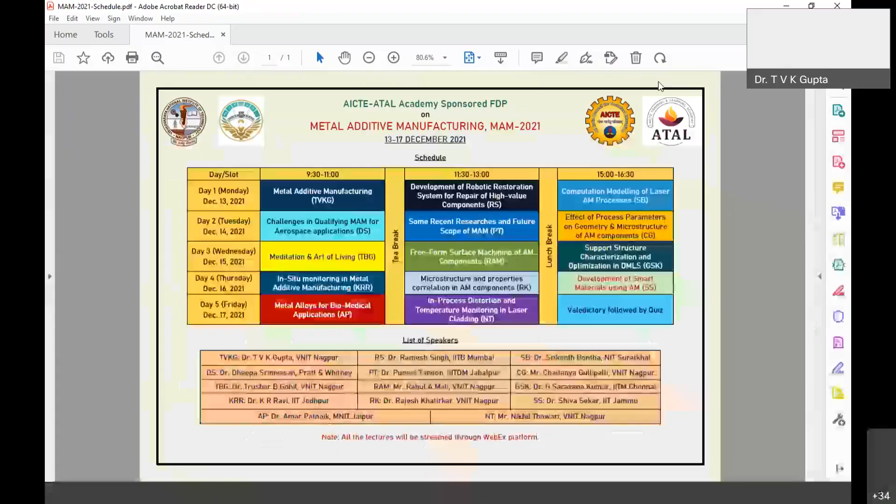Can you see the schedule? Is it visible? So the second session will be conducted by Dr. Ramesh Singh from IIT Bombay, and after lunch we will be having one faculty from NIT Surathkal, Dr. Saikanth Bontha, who will talk about computational modeling of laser additive manufacturing process. These are the 3 sessions for today.

Tomorrow we'll have 3 sessions. One from Dr. Dheepa Srinivasan, who is heading Pratt & Whitney in India, followed by Professor Puneet Tandon.

He's from IIITDM Jabalpur, and post lunch we'll be having a lecture from one of our PhD scholars who is working on process parameters and their effect on geometry and microstructure of additive manufacturing components.

On Wednesday, we will start the day with a session on meditation and the art of living by Dr. Trushar Gohil, who is from VNIT and my colleague in the Department of Mechanical Engineering. That will be followed by one of the PhD scholars.

He will be talking about how to carry out post-machining operations and freeform surface machining of AM components. After lunch on the third day, we will discuss support structure characterization and optimization, by Professor G. Saravana Kumar, who is from IIT Madras.

On the fourth day, the sessions will start with in-situ monitoring of metal additive manufacturing, delivered by Professor K. Ravi from IIT Jodhpur, followed by microstructural properties correlation with additive manufacturing components, by Rajesh Khatirkar.

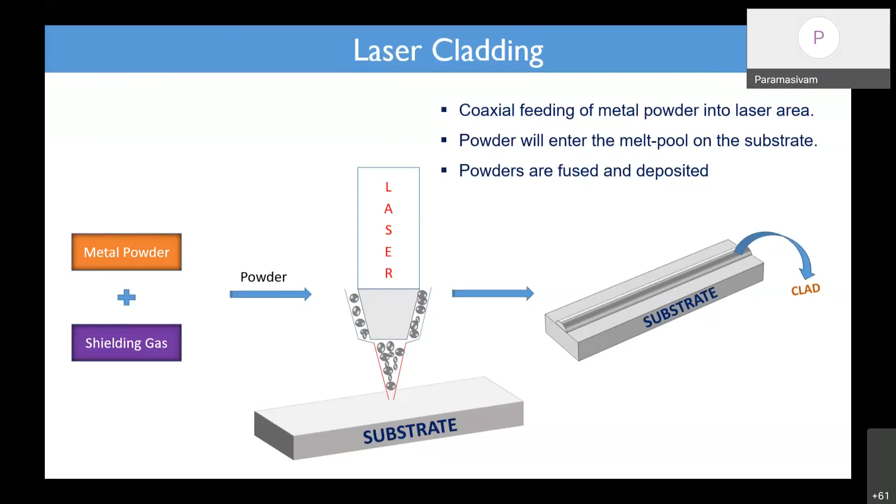If I want to use this laser cladding process as additive manufacturing, you have to do a lot of homework - whether when depositing layer by layer using high power or high wattage, each layer is getting adhered with proper adhesion strength or not. So we started working with single layer, double layer, and now we have gone up to 15 layers, making this laser cladding work.

So when you talk about additive manufacturing using this process, let me just show a small video of how we are going to deposit it.

Can you see the video? Is the video visible? Yes, sir, it is visible.

Now, it all depends on the system which we are currently using, the same system as our industry partner. There it is rotating from the bottom. But if you try to use a prismatic or freeform component, the gun is going to move according to the shape, controlled by a robotic arm.

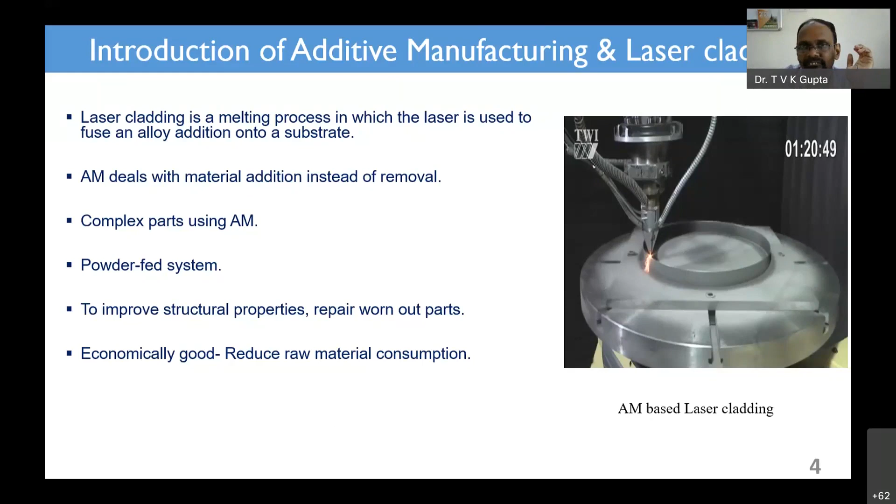Now, in the second project, we have to make sure whether Inconel material works, because turbine blades and gas turbine blades are made of Inconel material, since it has the properties to sustain very high strength at high temperatures. It should not lose its properties. So the project we are attempting is whether an Inconel component can be made by this laser cladding process or not. So we started working.

I'll show you some of the results where we went up to 12 layers. There are very good results which we have obtained.

Now, before coming to this laser cladding process of Inconel, we started with some hard alloys where you can increase the service life of the component by using some sort of deposition.

So we started with, okay, now when it comes to the process, what are the parameters which you are given a choice or freedom to change?

If you see, these systems are very, very expensive. A small 4 kilowatt machine, which we are using for the laser cladding process, costs somewhere around 6 to 7 crores for the whole setup. So the industry partner also will not be very interested to change the parameters. Whatever the OEM says, whatever the component or machine manufacturer says, they are going to strictly follow.

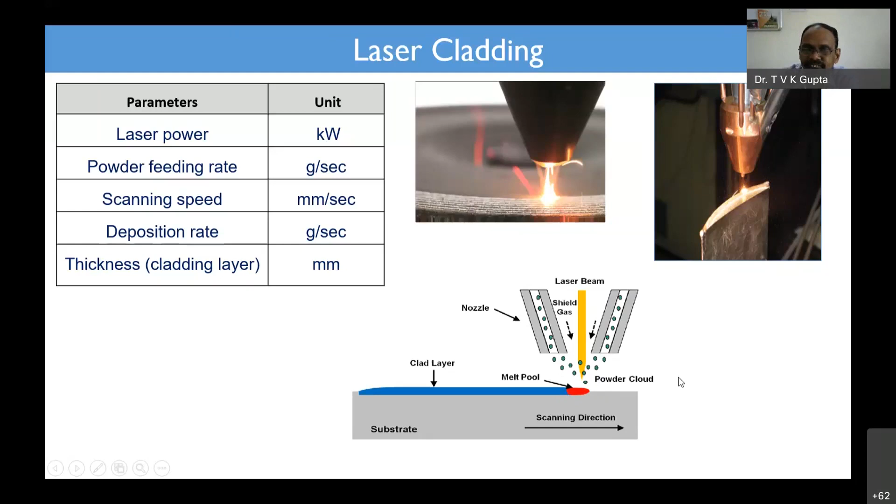Now we started our journey with Stellite 6, which is a cobalt-based stellite, a very tough material. This can be used in very high corrosion resistance environments.

So before starting any of the experiments, we used to characterize whether the chemical composition of Stellite 6 is according to the standards or not, because there are many companies who supply Stellite 6 in the country. So whoever is the supplier and whoever we buy from, first we used to characterize our powder.

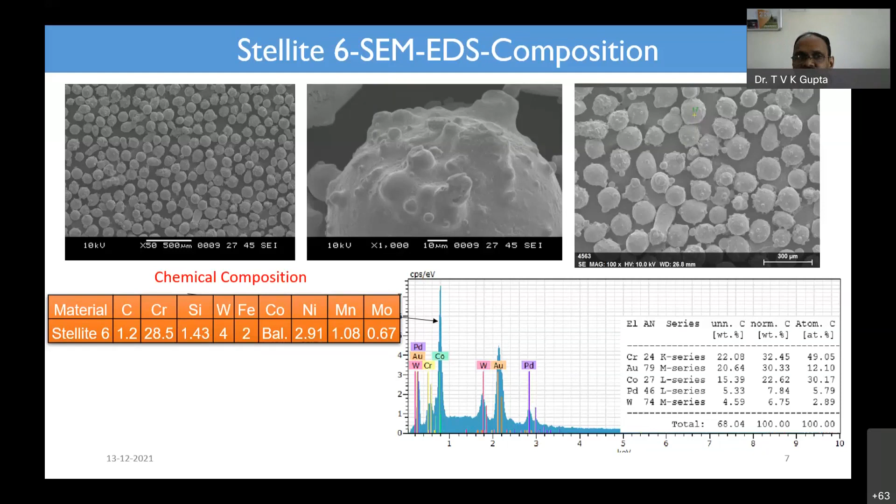Powders might come in different forms; it can be spherical or spheroidal, depending on the type of powder. For example, tungsten carbide will have a triangular shape of components. So these are the things we try to analyze through SEM and EDS analysis to understand the chemical composition. Even the manufacturer does the same thing, but we also get confirmation with our own tests.

This is the first set of experiments we tried with our industry partner. Initially when we approached the industry, they weren't very open to changing the parameters, but they wanted to do some research because on the components they had worked with, they had ignored certain issues. In the substrate, when depositing, there is a small amount of distortion we observe. We had considered it as a perfect plate, but when we deposited material, there was distortion on the substrate because of thermal deformation.

So we targeted how we can reduce this distortion. Based on this, we got about five different journal papers which people have appreciated in the country also, because Stellite 6 is used at very high temperature and harsh environment. This distortion in the substrate caused by heat is not allowed. But what they used to do is that though distortion is coming, they would do the machining process such that it becomes perfect again.

So instead of reducing the effort through post-processing, we asked whether we could do something more like optimizing the process itself. They had done optimization before, but it was superficial, only 1 or 2 parameters. We did a detailed investigation for 3 years. These parameters have been transferred to the industry partner, and today the life of the component they are making has gone from 2 months to 8 months, some components even up to 1 year, because we did a proper scientific and technical analysis.

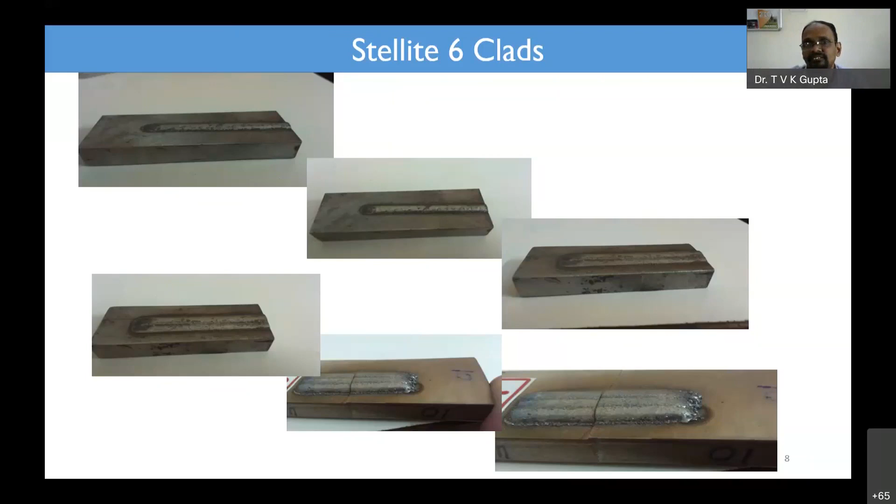So this is the first set of experiments we started. The machine we are using is about 4 kilowatts, and generally 80% of the power is suggested, but we went up to 90% of the power. We started with low power, 2.31 kilowatts, and also did 3.135 kilowatts. We did single layer, multi-layer, single track, and multi-track experiments to try to understand the phenomenon.

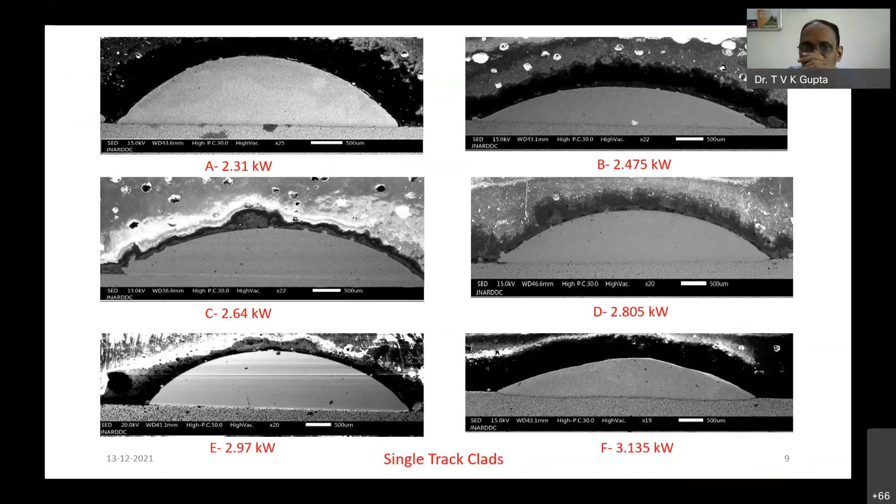These are the single tracks. If you see, multi-tracks means 1, 2, 3, 4, and multi-layer means 1, 2, 3, 4 like that. For these multi-layers, we went up to 12 layers with the Inconel. I'll be showing that very soon.

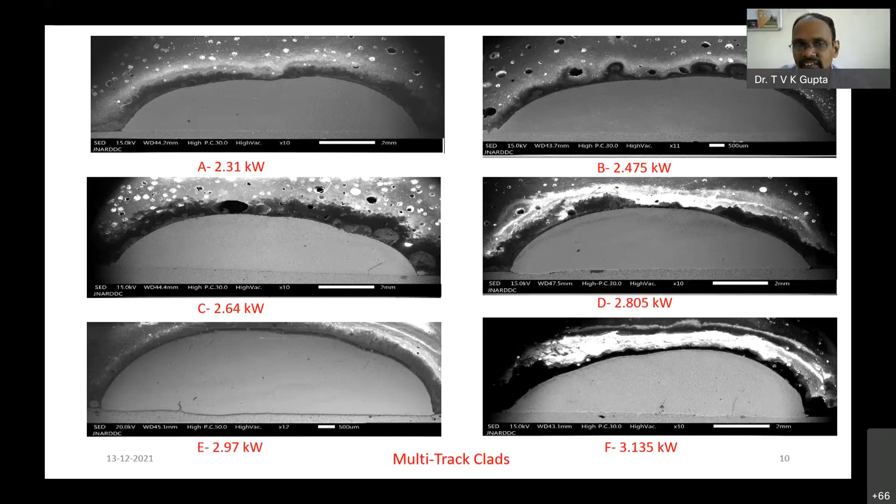Now, for the Stellite 6 cladding, they were not using high powers because they were more worried about their system. They wanted high deposition rate and faster movement also, because every industry partner says the faster the work gets done, the better it is for them. So they used to complete the process at a very fast rate with high deposition rate. But that will not work. If you use high deposition rate and high scan speed, you should have enough time to fuse that material, otherwise you will see a lot of wastage with no proper deposition.

So we asked them to address that too, and we did a pure scientific analysis. To convince these people took almost 6 months, but finally they got convinced in the first 6 months, and they have helped us a lot. We should thank Srinath Engineering Industries for that.

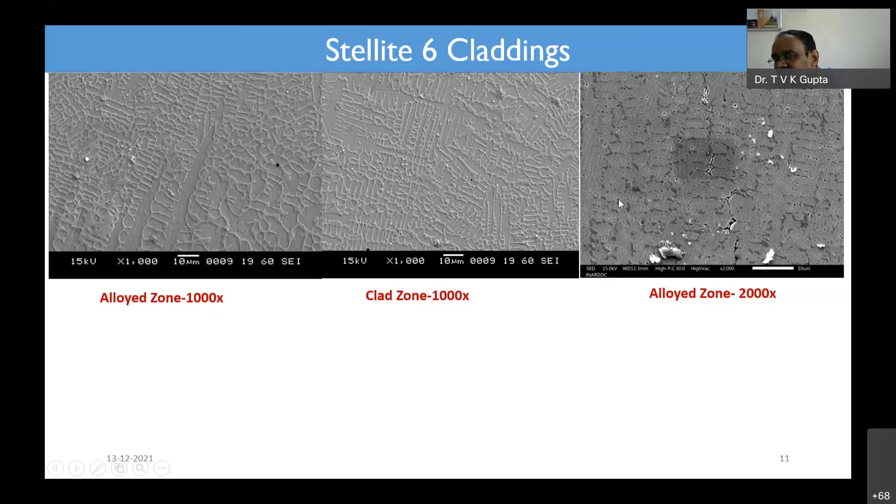If you try to see the SEM of the laser cladding of Stellite 6, this is the alloyed zone, this is the clad zone, and this again is the alloyed zone. But if you try to see at very high powers, what we have observed is cracks. This is not allowed, because in the process itself, there is a tendency for cracks to happen.

So then again, we restarted our work to try to optimize such that there should not be any cracks. In order to avoid cracks, we needed to reduce the thermal difference between the substrate and the clad. So how can you reduce that?

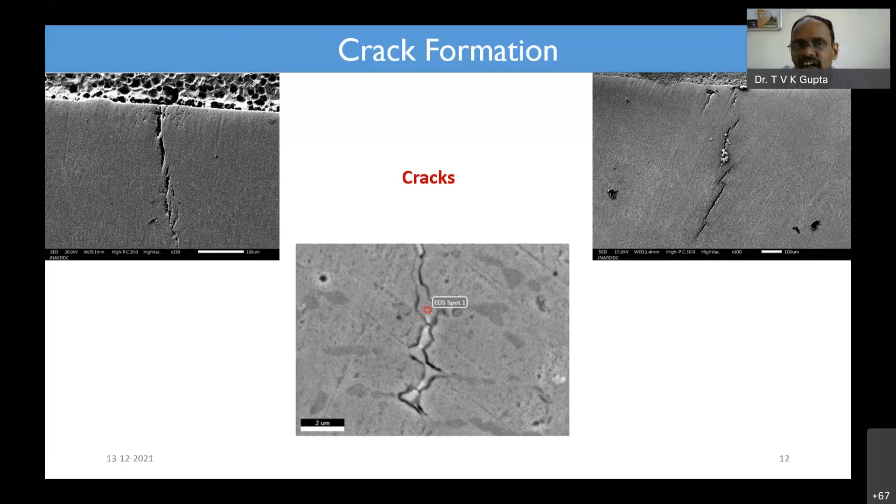Basically, you can reduce cracks by preheating the substrate, or you can change the parameters. That is what we have done. So in the next set, there were no cracks.

This is one component we have done for mining industries. These are the hard facing points, used in JCBs. Each tooth weighs some 30-40 kilos. After a week, you see the teeth worn down like something. So we tried to understand why this teeth is becoming like this within a week. And it is very expensive. Each tooth is so expensive that you cannot afford to change it every time.

So what we have seen is that wherever there is a hard contact point, we tried to face it by doing some finishing operation, surface finishing, to increase the surface life. Now every 6 months, or they are going to 6 months. Initially they were going every 3 months. Before that, they were changing it every week or 10 days. Now at least they are happy with this. Almost 600% time, they have increased the life of the component with this small amount of coating on the surface.

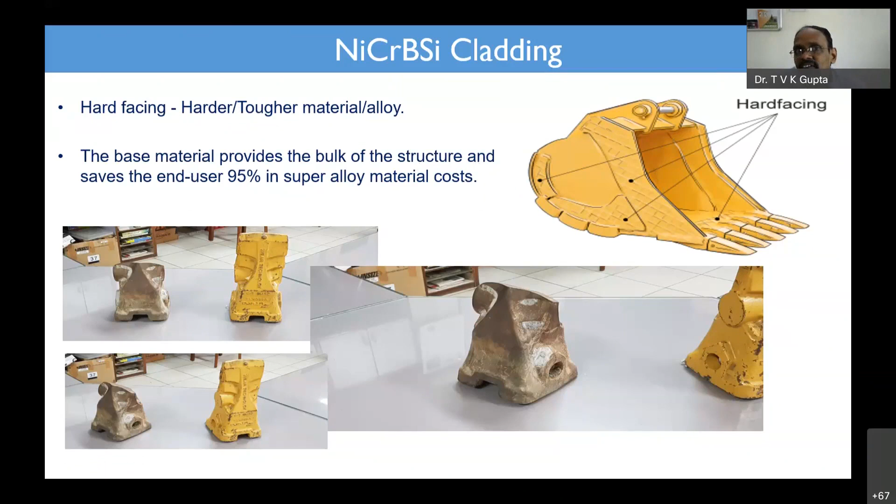Now, we understand that there are various aspects in laser cladding, because heat is involved, mechanical properties are changing, and metallurgically, though they say it will not change, there will be some amount of change in the properties. So what are the aspects which we can work on from a research point of view?

We thought first we have to understand what process parameters are going to affect the microstructure and mechanical properties. So then we understood the heating and cooling cycle, how heat transfer takes place, and what will be the melt pool shape and size, dynamics, and solidification. These are the aspects which we targeted and worked on, and we were successful.

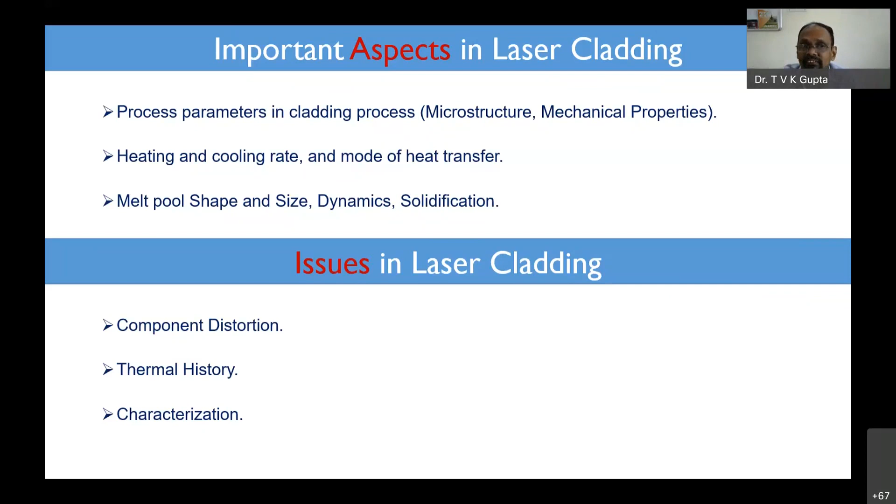So the issues, as I told you, component distortion will be there. What is the characterization property? What are the mechanical, metallurgical properties, and what will be the thermal history? Those things we targeted and worked on, and we were very much successful.

The first thing is, when you say distortion, how much is the distortion? How are you going to monitor it? You need to have some sort of setup, some sensors, because distortion is happening due to temperature. How can you reduce the temperature? You should know what amount of temperature the material is subjected to. It's not that if you give 2 kilowatts of power, the temperature is fixed - it's a combination of many parameters.

So then we made our own setup, our own fixtures, and one of our PhD scholars has worked on this for his PhD. He worked with pyrometers and a laser displacement sensor. He will be talking about those things in the last lecture, the research he has done in the last 3.5 years. We used laser displacement sensors, pyrometers, and different fixtures - 2-3 fixtures we tried, and finally we arrived at this fixture.

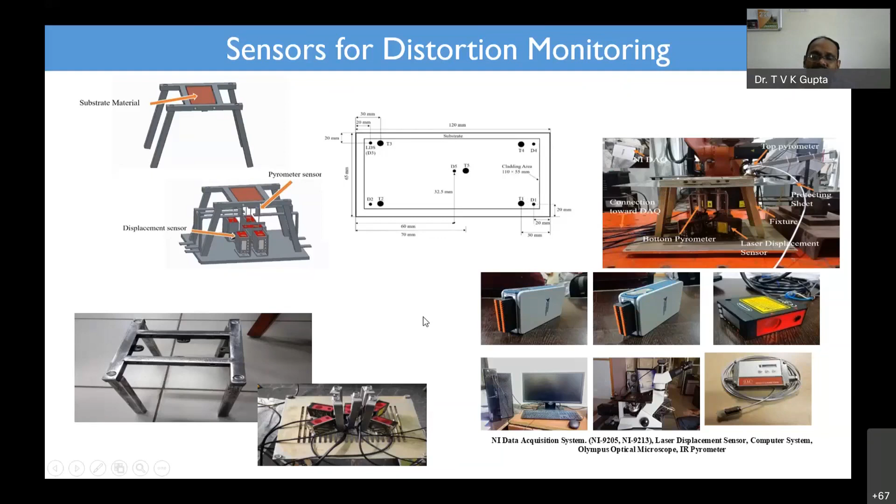Now, how can you monitor the temperature? You need to have a pyrometer. So bottom temperatures also we have generated, and there is a top pyrometer also which we used, where you can understand the melt pool. If you understand what the temperature is, then it is obvious.

Over a period of time, we thought, why are we making only direct stellite 6 on stainless steel? We thought, can we use a different material instead, where you can increase the hardness of the component and reduce the temperature difference such that the deformation also can be reduced.

So what the student has done is use a buffer layer concept. A buffer layer is like a sandwich - in between two layers, you have one more layer, which gives a better result. Here also we have used Inconel 625, where between the stellite 6 and the stainless steel, we made a sandwich material of Inconel.

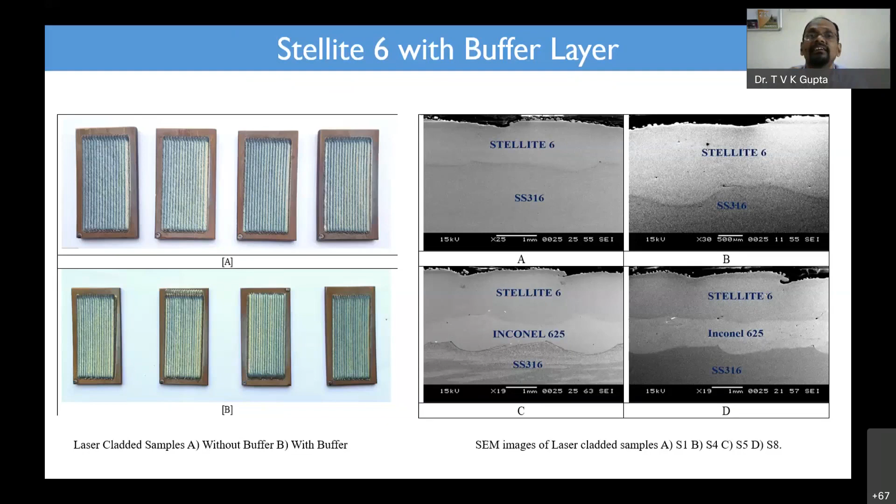So he has achieved 2 papers also from this work, and the industry partner is right now doing the same thing for his components.

So then we try to optimize, and this is the best possible thing which we could also understand.

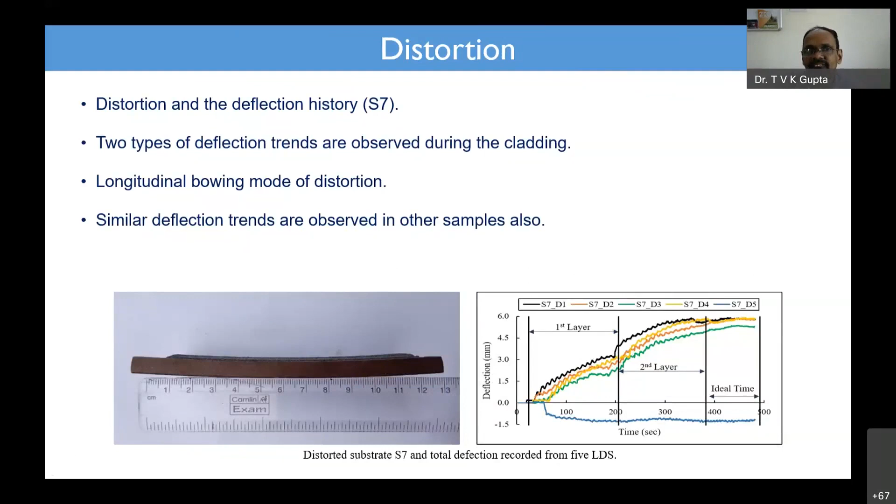Now, different parameters we studied, if you try to see, each layer got almost 16 tracks, and 2 layers, up to 2 layers we have worked. And the next set is that we went up to 12 layers, that's a different part.

So we started with Stellite 6, I told you, 2 layers we have done, and we are understanding how the track temperature is being changed, how the layer temperature is also changed. Because temperature always leads to deformation, and deformation leads to distortion.

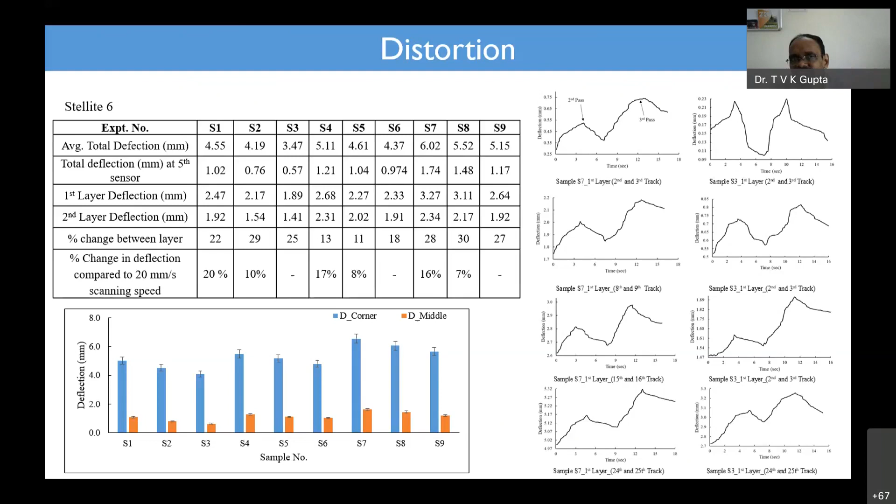Then we tried with temperature monitoring. So in order to monitor the temperature, we have used pyrometers. Before that, we thought that we would use some sort of simulation process where you can understand what is the process in which the temperature is going to vary across the surface.

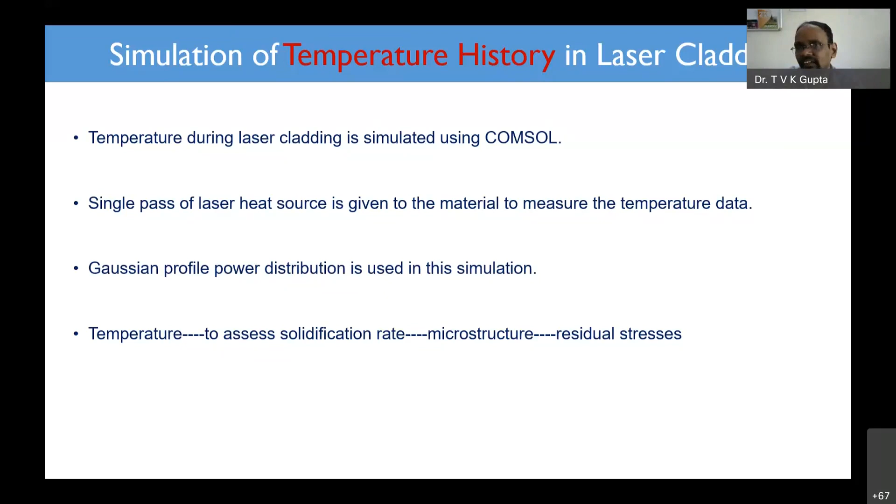So we used COMSOL to understand the temperature distribution in the cladding process. We have used a single pass heat transfer source to the material, and to measure the temperature data we have used pyrometers in almost every location. The temperature through simulation we got, and whatever is experimentally obtained, we tried to simulate it.

Now, if you see, the laser is moving along this path, and the temperature at a point is going to come out something like this. This is the present model which we have used, and this is the model which was used by someone else about 10, 12 years back. So now we are getting the same process actually.

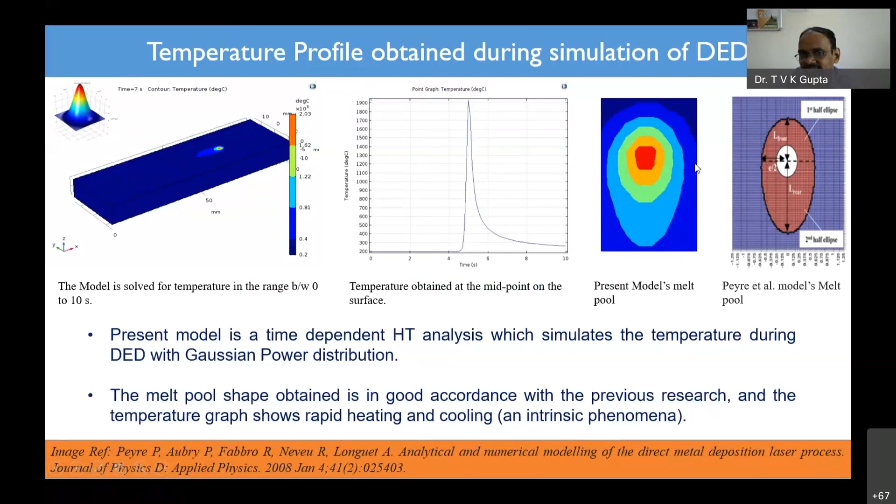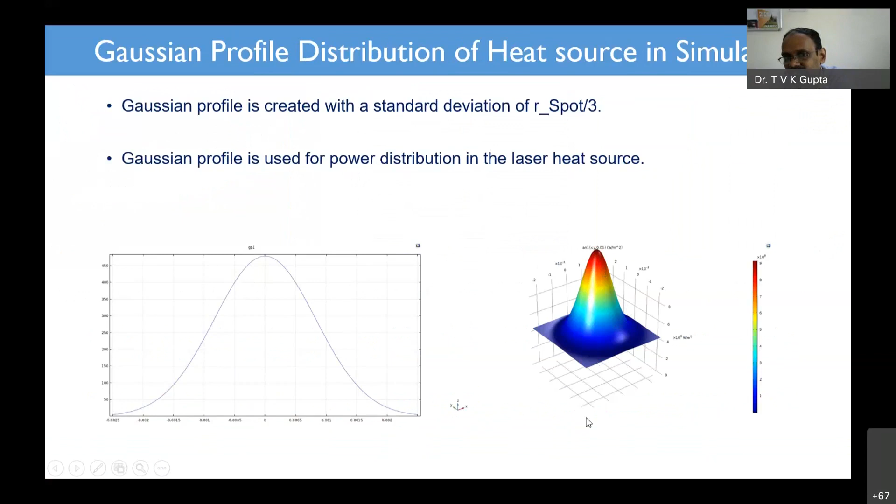So whatever simulation we are doing is correct actually, since we have used a Gaussian power distribution. Now this is the Gaussian distribution I told about. The power profile is the Gaussian distribution, and you are going to see the temperature profile along the thickness, along the width, and also along the depth.

Now, if you see at each and every layer, each and every point, you can always see there is a temperature phenomenon which is happening. The temperature is being transferred to the substrate also. Now if you see the substrate, even at this location, the temperature is somewhere around 600 to 700 degrees centigrade in the substrate.

So on the melt pool, you are going to get 1900 degrees centigrade. So this we try to simulate and also try to check whether we are getting the same result with these parameters or not.

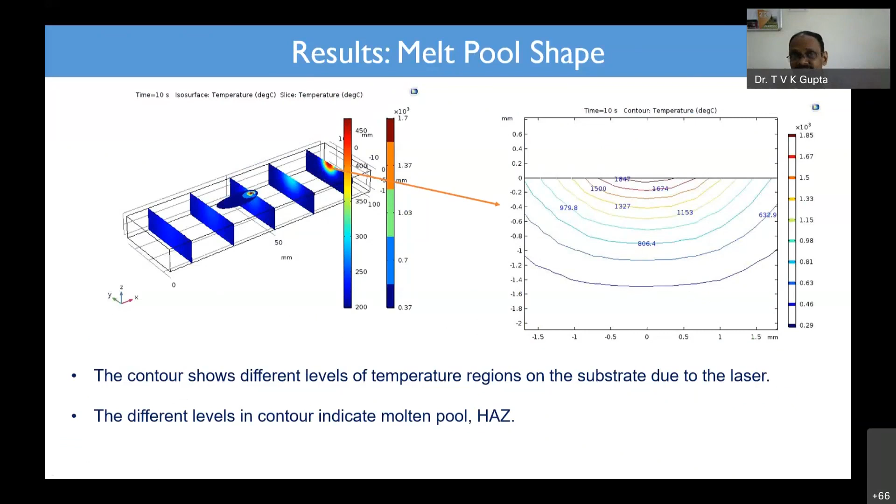So these are the temperatures approximately. We got around 1897, I think 1847 degrees temperature at this point, and after this we have done simulation at different time steps.

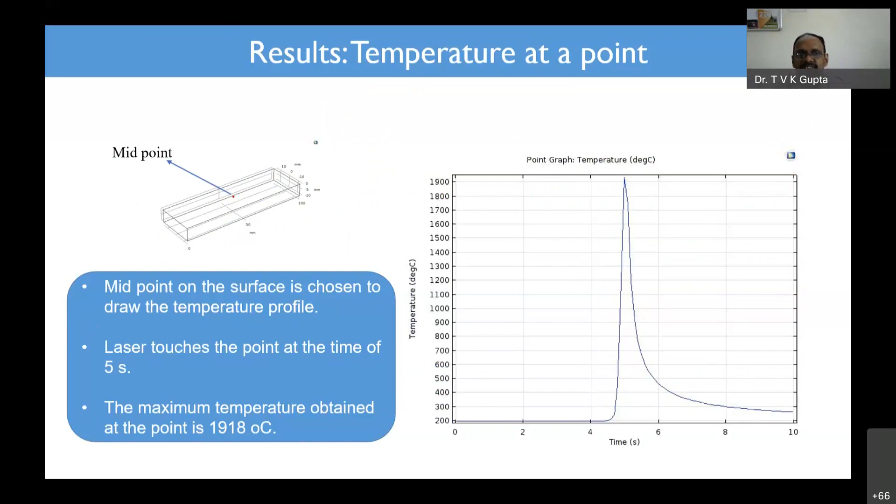Now, if you try to see, this is the profile which people have done elsewhere, and this is the profile which we got from the simulation. So more or less, it is going to be the same.

Now, if you try to see the melt pool history, there is heating, there is cooling, there is a melt pool lifetime, there is solidification, because the moment you deposit, it takes time to solidify. The solidification time also we should know. What is the undercooling? These are all monitored using our pyrometers.

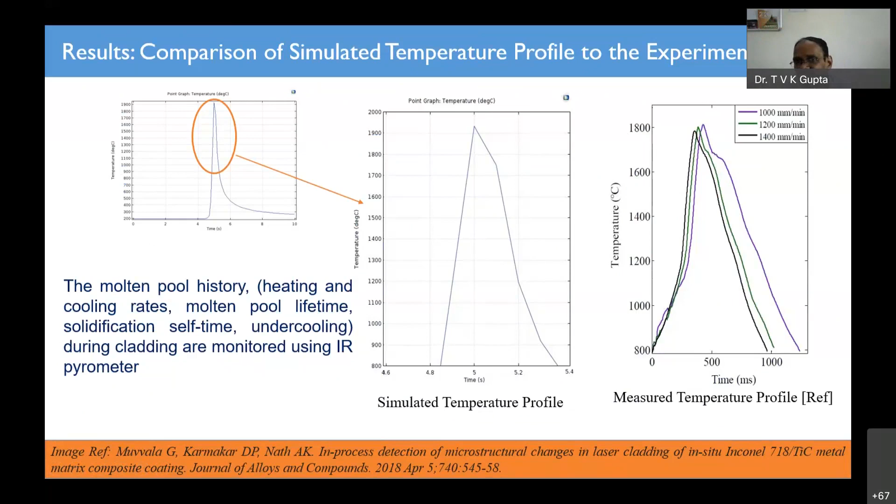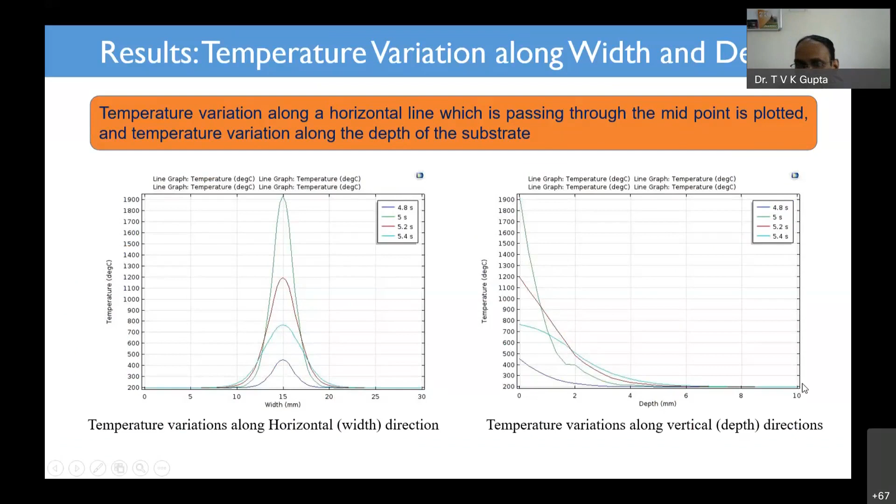You see the temperature profile along this width, this is the temperature which we got. If you try to see, at the middle point you are going to get this temperature. Now if you try to see along the depth, depth will be somewhere around 1918, and this goes to 0 with respect to depth, meaning it is coming down to the room temperature.

Now, if you see when the laser is moving, there is a distortion. You see how the component is distorting. So we try to measure this using the laser displacement sensors I told you about. Because the substrate got deformed into a concave shape. After deposition, it goes like this, and it will be a permanent deformation in the substrate. So you will have both expansion and contraction.

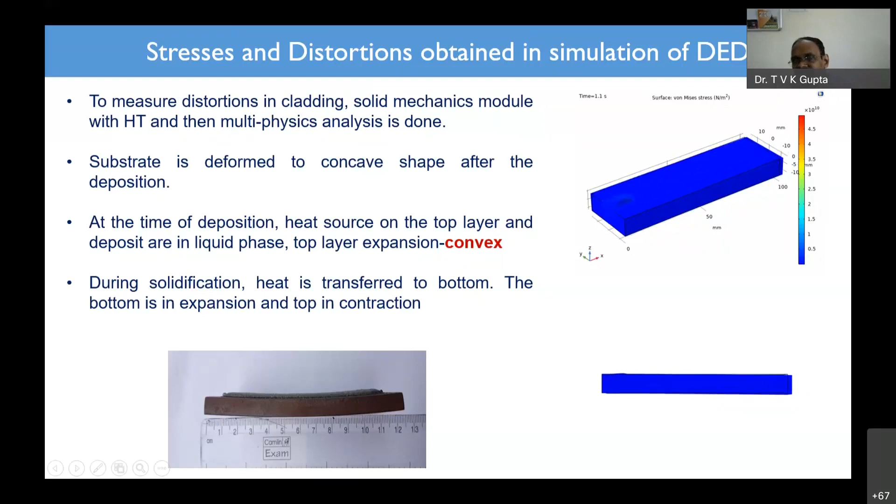Now we started with Inconel 718, the aerospace alloy, which is of more interest to us. Even the first student worked with Stellite 6 and Inconel, because more or less they have the same thermomechanical properties. He tried to correlate the distortions and temperature comparing these two alloys.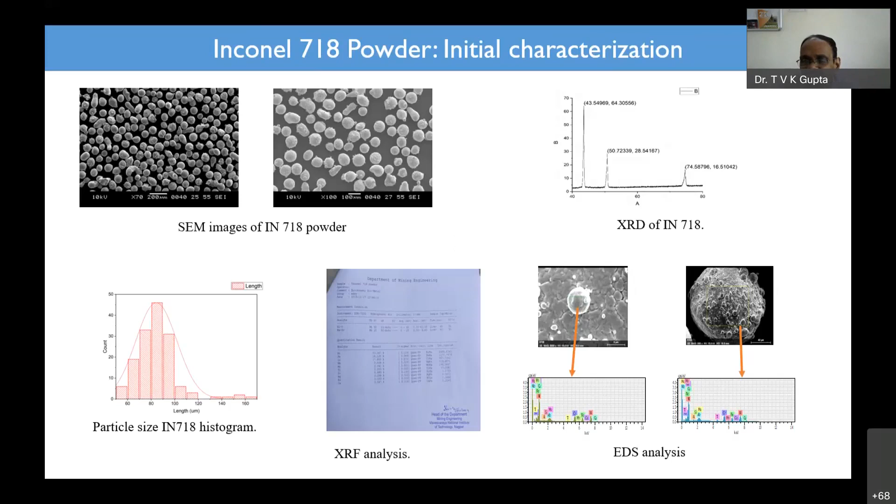Again, as I told, we have done the powder characterization. This is a simple one, and we have done the phase analysis also to understand. This is all the metallurgical part.

Now, as I told you about the role of process parameters, you should always have some information before doing an experiment. The deposition quality is influenced by process parameters. In order to achieve the best process parameter set, you should know it. So you have laser power, scanning speed, powder feed, and we have developed a model, and output parameters.

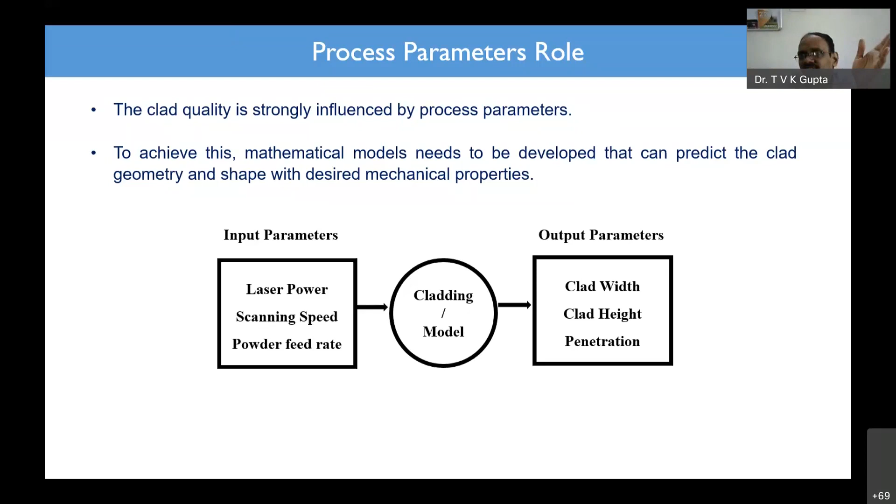Clad is nothing but deposition, and we are more interested in the geometry, leaving the metallurgical aspects aside. So the geometry of the component is more important. We try to understand clad width, height, and penetration. This is the set of experiments we have done for Inconel 718.

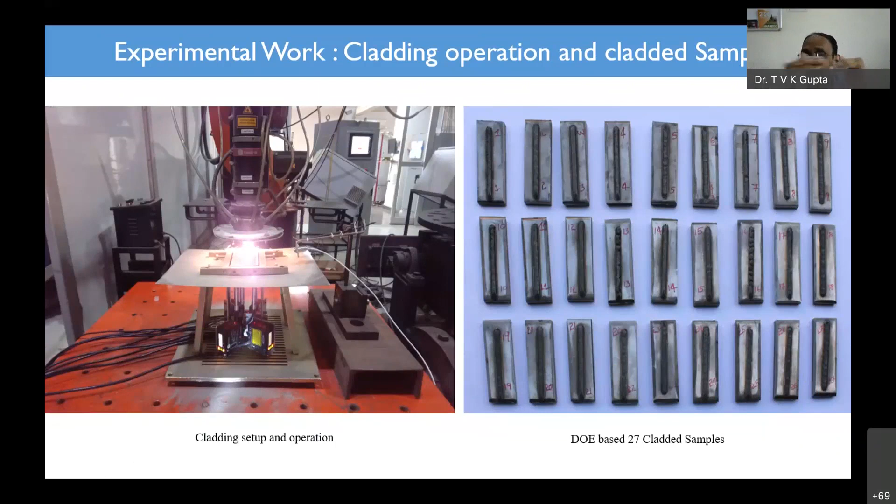All 27 experiments we have executed, we have seen. We kept a top pyrometer also to see the multiple temperatures at the top side. Now, if you see some of the components, some tracks were not deposited properly because Inconel is a very high temperature alloy. That temperature or power which we used was not sufficient to melt the powder.

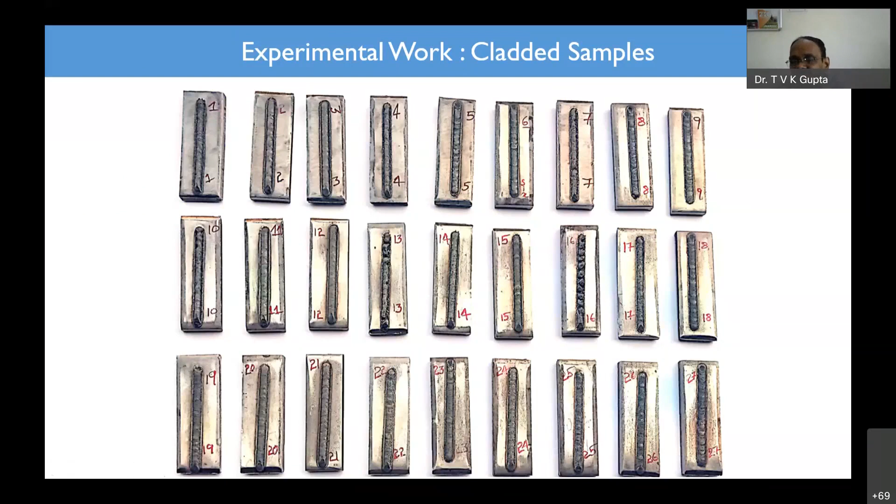If you try to see some of the components, here you see this is a perfect clad. But if you see this one, at 16, it is not a perfect clad. This one at 13 had some problems, and some at 25 also. It depends on what type of power you are going to use. These are the issues we understood in the initial set of experiments.

Then what we have done is optimize. We thought that for low powers, if you want to do deposition, you should have a low scanning speed, because you will have enough time to melt the powder and also deposit.

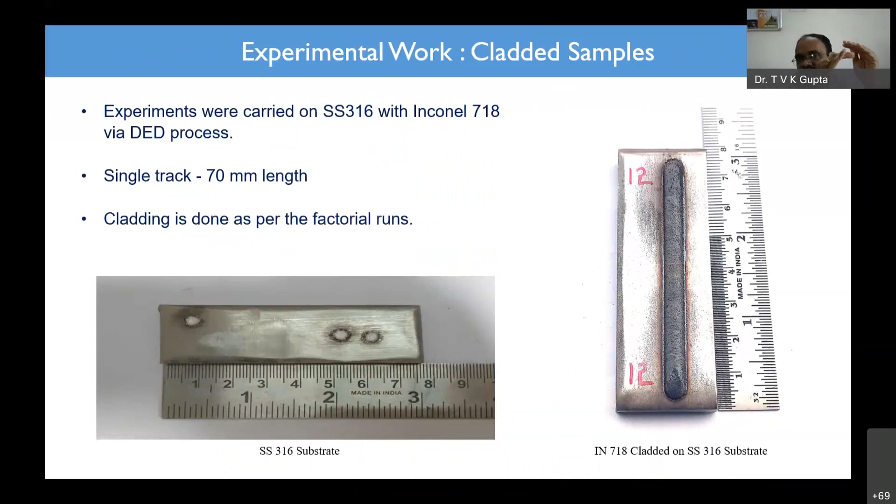Now, if you try to see, these components are all single tracks. Then we went for multi-tracks. If you try to understand the physics now, you have a substrate and a deposit, this is like a clad. So how much material is going inside? That we have to find out in terms of dilution, as they call it. The dilution has to be as minimum as possible, and it should have good bonding strength also.

So these are the samples in Inconel. We have done this for different layers. Initially we went for 4 layers also. The more layers you have, the more problems you will face. But you can still achieve a better result with more layers in order to get a perfect component, though you have to do the optimization.

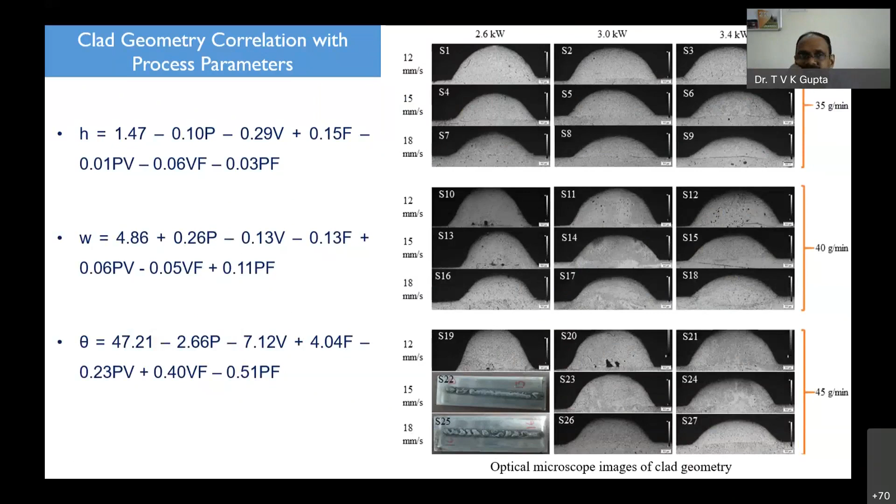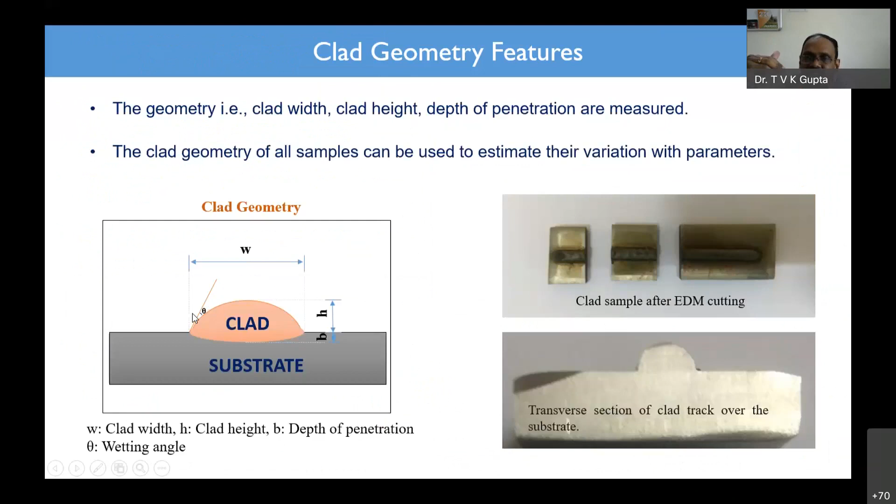Now, if you try to see all the 27 experiments, this was done by one of our PhD scholars. He will be talking more in detail about the process parameter optimization tomorrow afternoon. He was talking about the wetting angle, the theta shown here, how much surface tension you are going to use, and whether you are going to have a proper deposition or not, he will discuss.

Now, when I say mechanical and microstructural properties are going to change, that means you have a different microstructure at different levels of deposition. So all the samples were done for microstructural evaluation, to see how it evolves. This has been published in Materials Today Communications, the microstructure evaluation for Stellite 6 and Inconel 718.

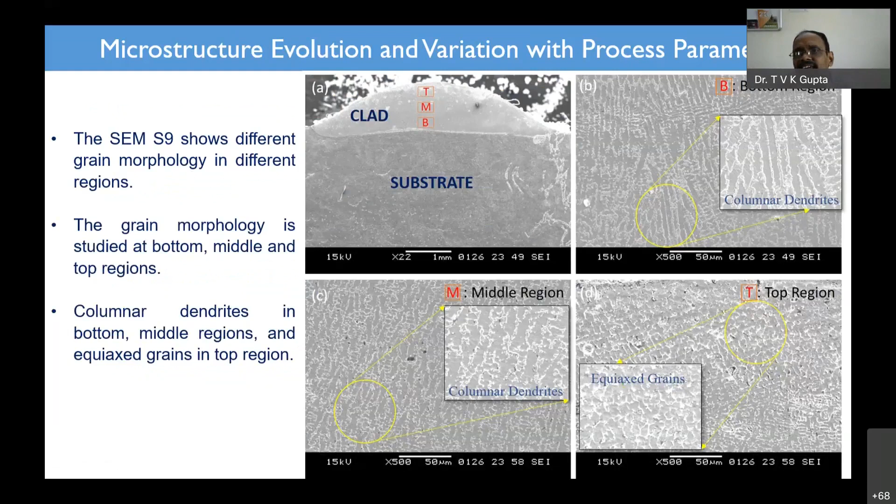Now, if you see the process parameters on the microstructure evolution, you have to see which process you will be having, a better, good solidification time and good cooling rate. Those things will be useful to understand.

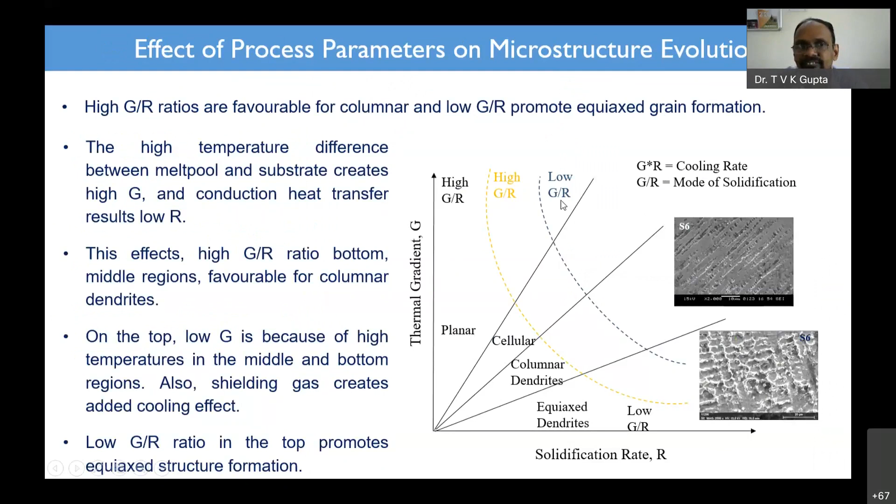So these are the microstructure samples. If you see 1 to 9, how the structure is changing for various parameters. So now people were asking about this. This was done in the Arabian Journal.

We got it published. There, people were asking, what is your dendrite arm spacing? How close are you having this spacing? So that day, again, he has done some sort of mathematical calculations also. It's not that only microstructure and experiments matter; you have to do some sort of mathematical analysis.

Analytical model has to be developed. Then only it will be having some sort of engineering appreciability.

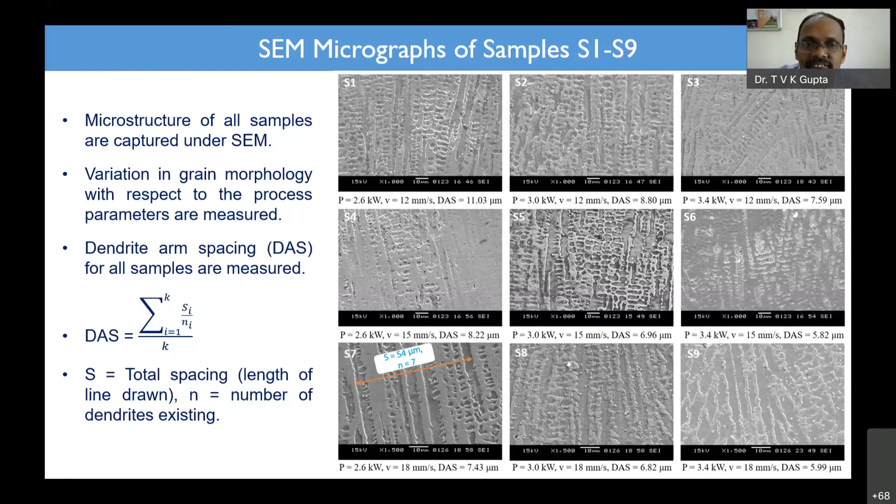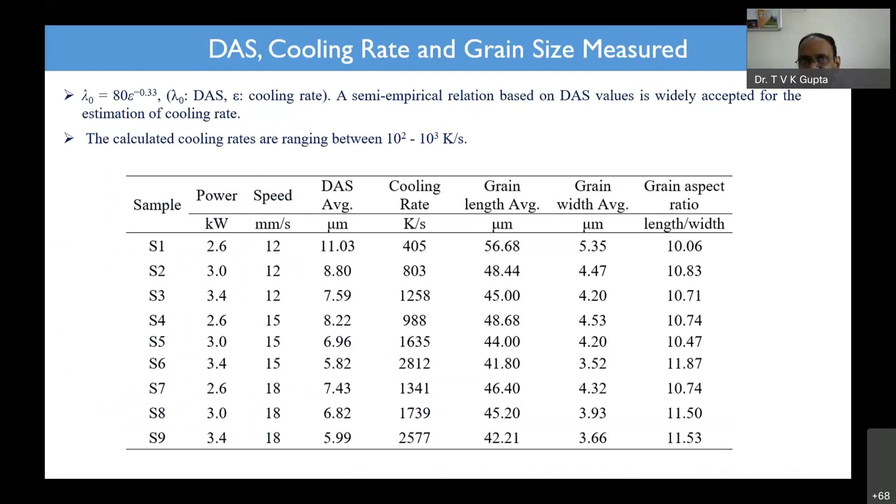Now, the dendrite arm spacing, cooling rate, grain size, he measured and he has done some sort of analysis. So the effect of process parameters on the cooling rate, he will be talking about tomorrow. How the cooling rate is going to affect the grain size also, this is one of the cases we were talking about.

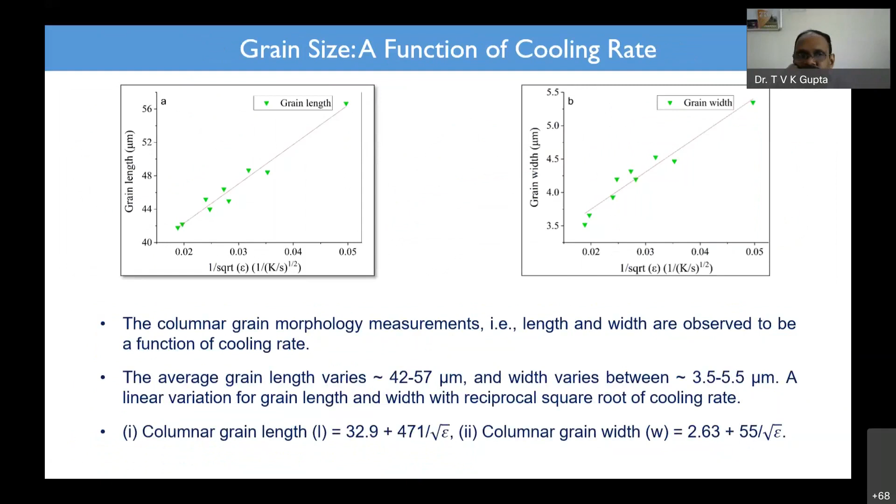Now, the solidification process, if you try to see, solidification of steels is something different. Solidification of nickel-based alloys is something different. In the solidification of steels, you will get only whatever is the martensite, cementite, or pearlite, whatever structures you are going to get in iron-based alloys.

But in the case of nickel-based alloys, there will be different phases which you are going to see. Like you have some elements such as niobium, molybdenum, titanium. So the solidification, if you see in 718, starts with gamma dendrites and it is going to eject niobium into the liquid metal. That is the first step.

Stepwise, if you see, and finally when you are trying to do the solidification, there are some phases, different forms of phases. If you are a metallurgical engineer, you will appreciate this more. But as a mechanical engineer, what we are interested in is whether the shape you are going to get is correct or not, whether the hardness you are going to get is correct or not, whether the fatigue life of the component is better or not. Those are the things we are going to concentrate on.

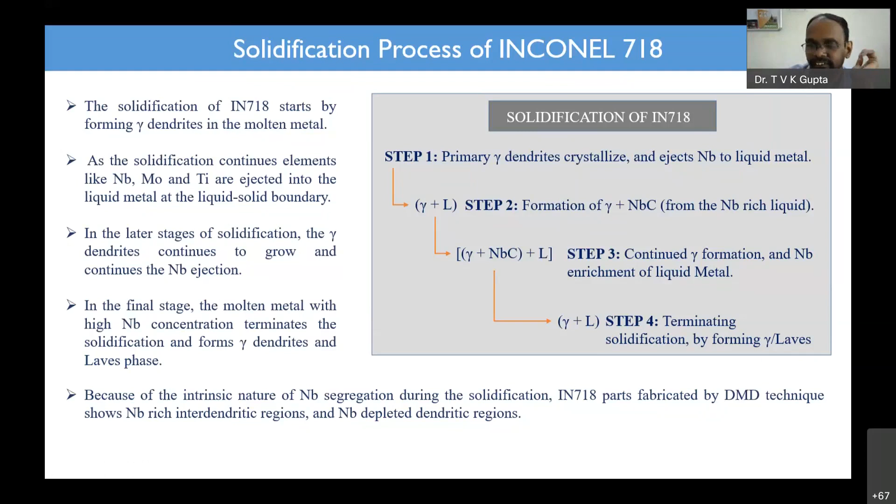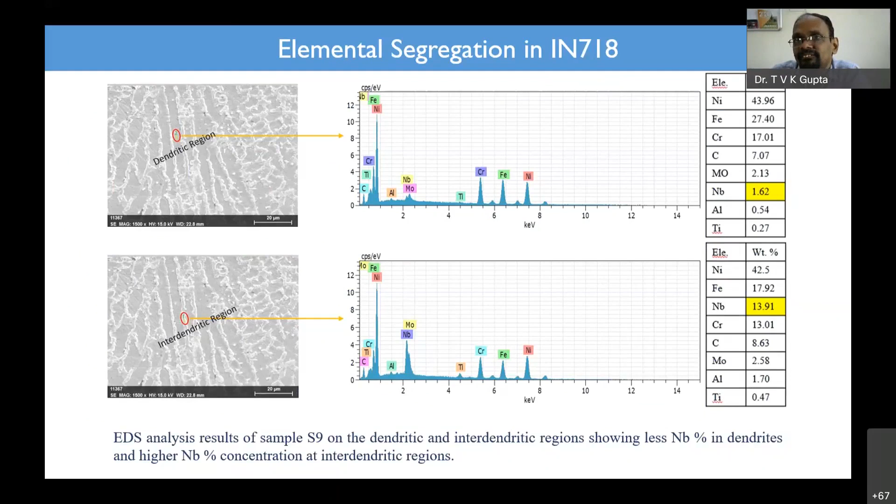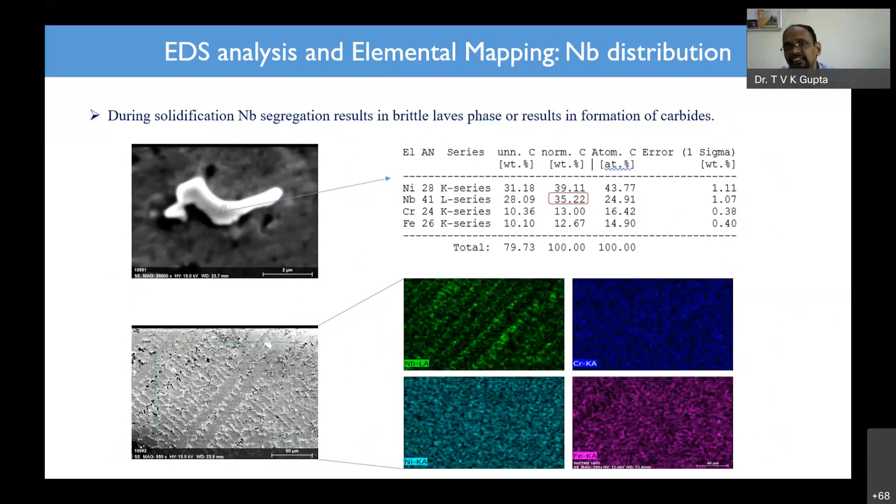So these are the elemental segregation studies the research scholar has done, talking about the dendritic region, interdendritic region, how the segregation is happening in the 718 material edge. This is the EDS analysis. He tried to map the different elements using this, to understand how the element distribution is there in the structures.

Now, micro hardness, as a mechanical engineer, we should appreciate this because micro hardness is one of the biggest things. Everyone will be interested from a mechanical point of view. So you say that whatever amount of load I am going to apply, the deformation should not be there. Deformation should not be there means it should have a high amount of resistivity, so the hardness of the component has to increase.

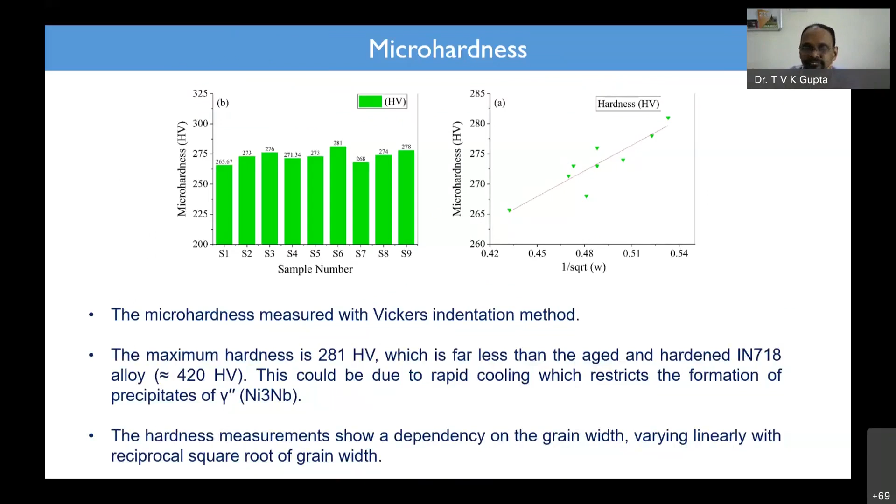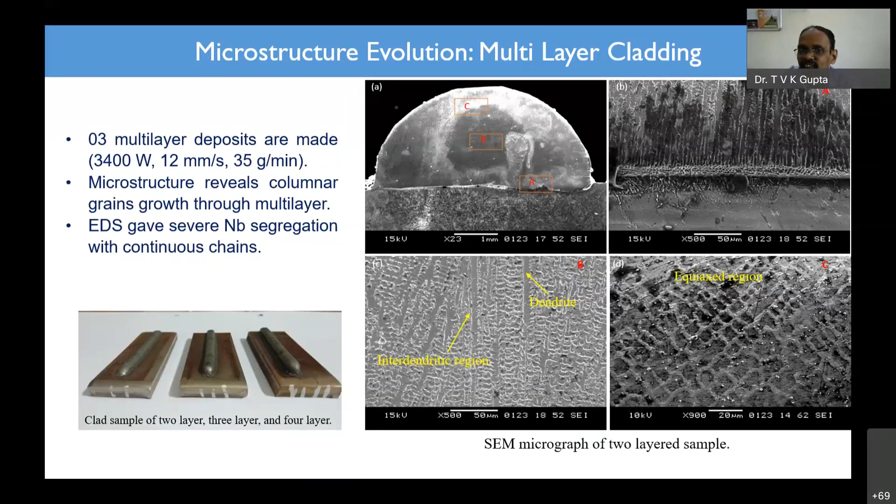So the moment when you are coming from bottom to top, the microstructure of Inconel 718 is changing. This is being seen in the 2 layer, 3 layer, and even in the 4 layer also, it is the same.

Now, when you see the hardness, for different layers you are going to see how the hardness is going to change. But not much variation in the case of hardness we have seen. However, in the case of different layers, what we understood is that the microstructure is changing enormously.

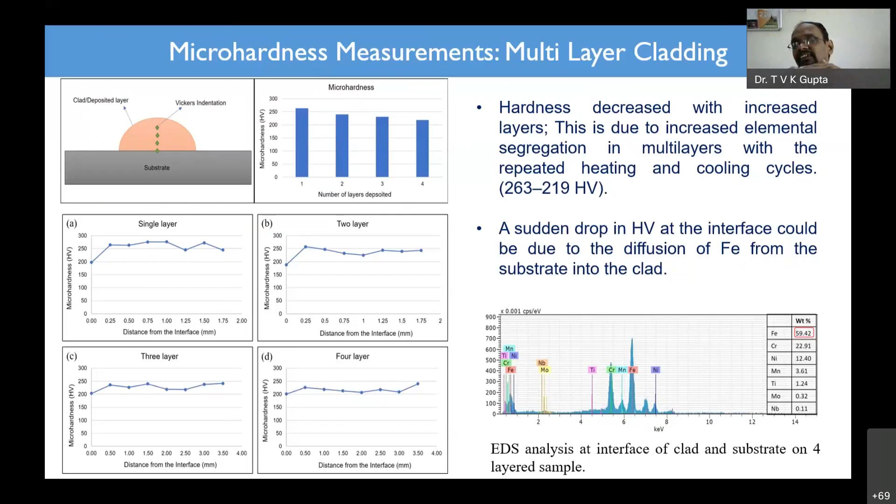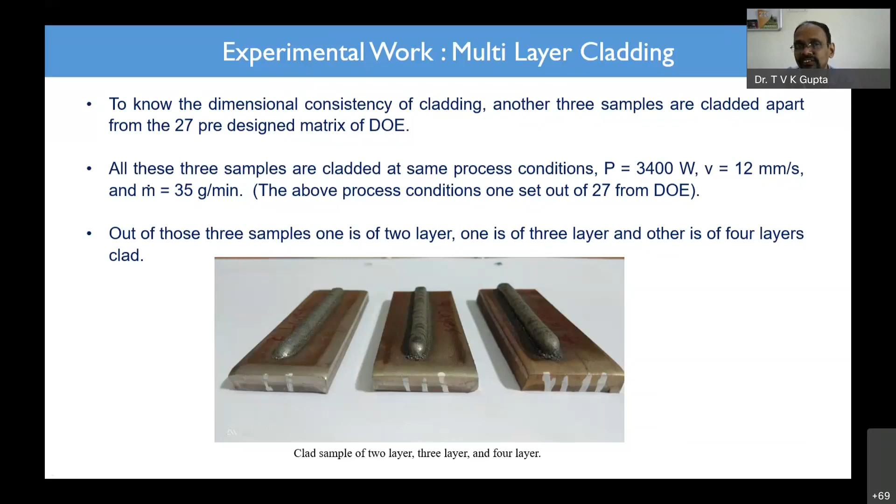So this is what we see if you try to look at the multi-layer cladding, which we started with the first set of experiments for multi-layer cladding. Based on the 27 experiments we have done, we considered one process, one parametric set that we thought would be the best, and used it for 2, 3, and 4 layers. So 2 layer, 3 layer, 4 layer with the same set of experiments, without changing parameters, to see how it affects the microstructure and the mechanical properties.

Now, for the simulation, whatever you try to understand through FEM simulation, you can do it in ANSYS, but COMSOL is a better version where you have all the modules integrated in different modules, and it is also user friendly.

You have to use different expressions if you want to study distortion, the mechanical aspect. And if you want to study temperature, then heat transfer analysis has to be done. So you have to couple two different sets and bring the entire thing into a single form, because the distortion is happening due to temperature. When you say distortion due to temperature, that means you need a heat transfer module. But distortion is a mechanical phenomenon, so you will be using a von Mises criteria. So you have to couple both the mechanical module and the heat transfer module in order to get the distortion.

Also, the residual stresses can be calculated from the software. The same thing you can always do through experiments as well. We have done some experiments using XRD for residual stress measurement from IIT Bombay, and we tried to compare the residual stresses obtained through XRD with those from simulation. We were successful, with only about 12 to 14% error.

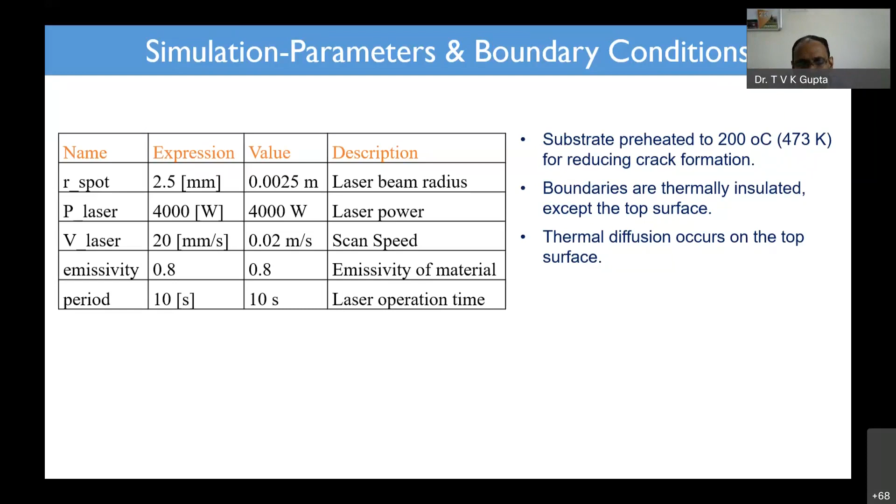Now, if you see initially the temperature, we have considered preheating for every component, up to 200 degrees centigrade, and then we have deposited, such that the distortion is as minimum as possible. In fact, in aerospace components, distortion is not at all allowed. They don't allow any distortion. So for that, you need to do a lot of homework and optimize a huge number of parameters. Only then will you have minimum distortion.

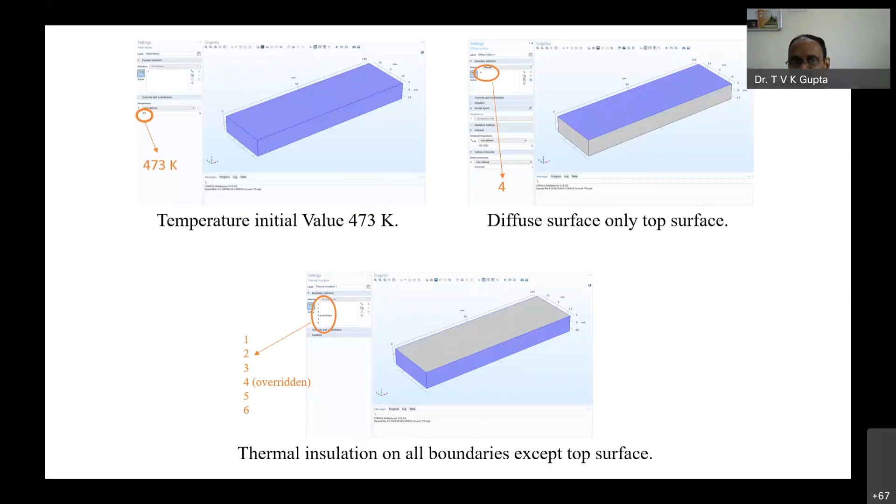Now if you try to see these various aspects, once the laser moves like this, what temperature are you going to generate? If you see the temperature, within 10 seconds' time it will be having a large amount of these effects.

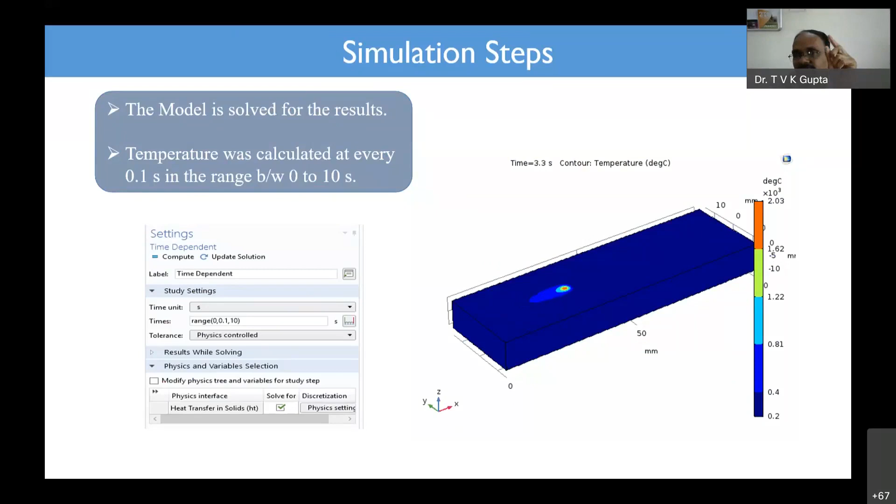Now, if you see the parameters we are talking about, like temperature and the melt pool size, the melt pool size is also important. If you remember, in the beginning we were talking about keeping one pyrometer to understand the melt pool temperature. So the melt pool size is also important. Based on the melt pool size, we have understood how the parameters are going to affect it, meaning what is the size of the melt pool and what temperature you are going to generate.

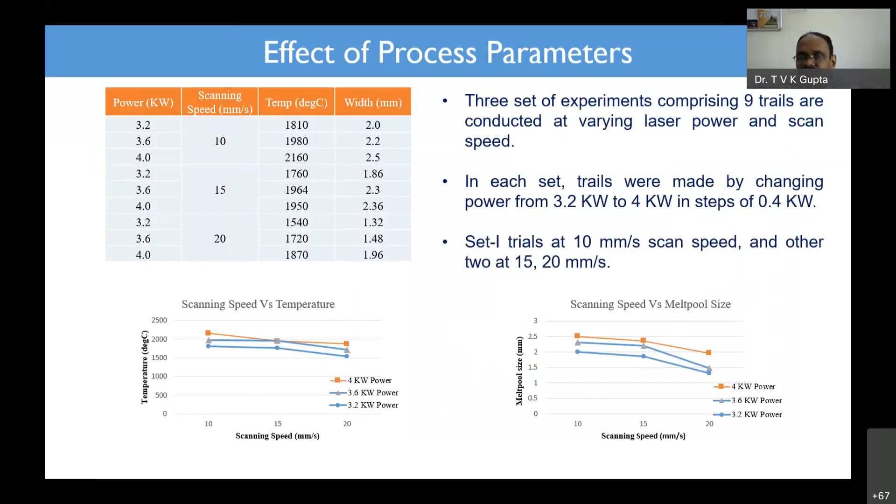So this is something we are still trying to understand: the interaction between solid and liquid phenomena in metal additive manufacturing, particularly in cladding, because the solid material, the moment it melts, will be in liquid form. So we have to understand the effect of the Marangoni effect, and when you look at the simulation, how the fluid is flowing. This requires an in-depth analysis, which you have to actually carry out.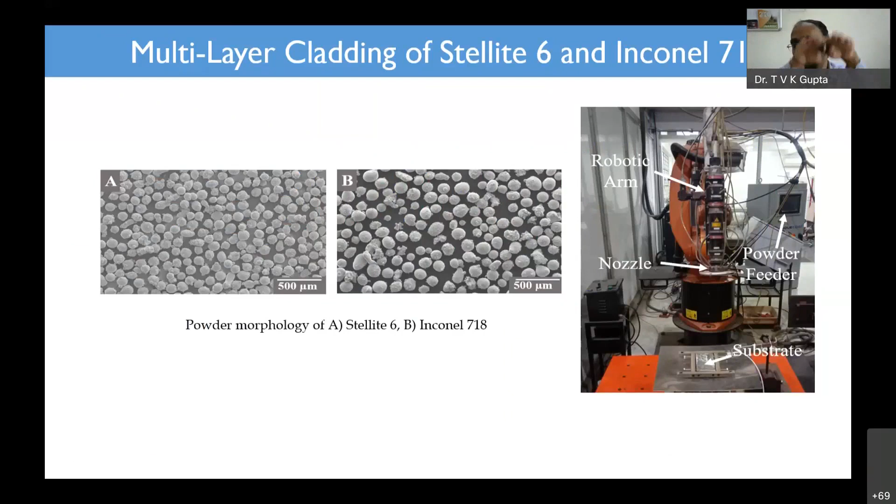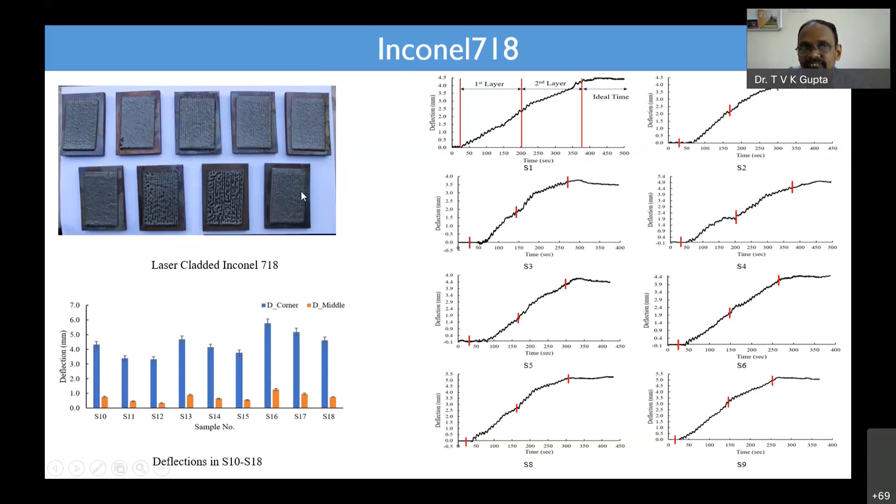For this Inconel 718, if you try to see this figure, this is a very bad deposition. The deposition is very poor, meaning the power is not sufficient even when trying for a second layer. These are the second layer components, which we have done for almost 75 mm and 2 layers.

But this is Stellite 6. Stellite 6 we have already optimized the parameters. Now you have the perfect morphology which we got, whatever we are going to look at.

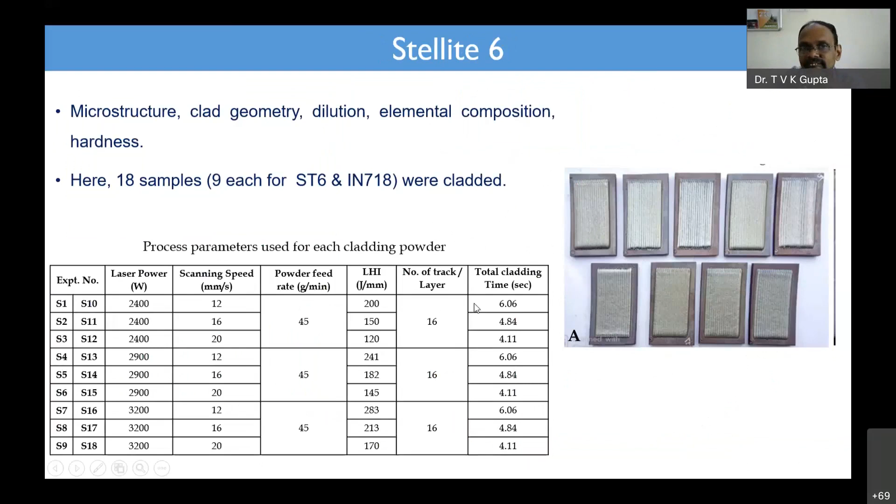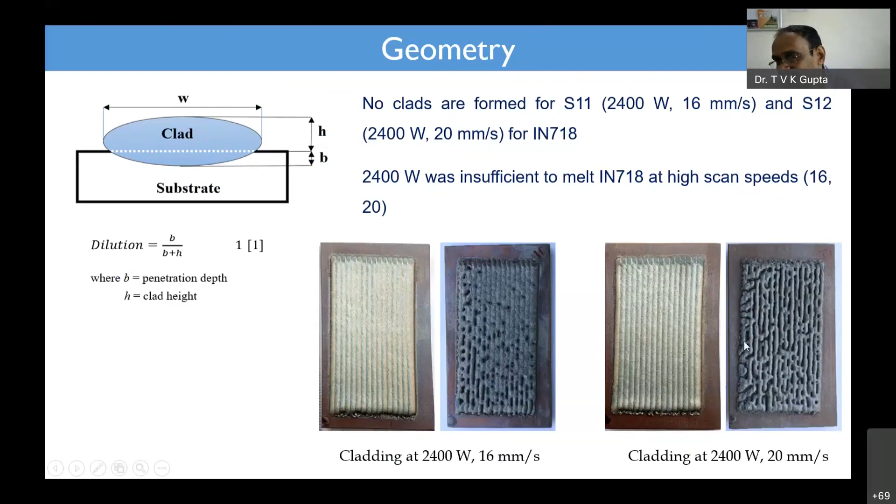If you see the cladding at low power, Stellite is a very good cladding. Inconel is insufficient, because the proper heating or melting of Inconel did not happen. If you see the substrate, Stellite on substrate and Inconel 2 alloys, 2 layers we have deposited. This is the first PhD scholar's work.

He will be talking in detail, not tomorrow, but on the last day.

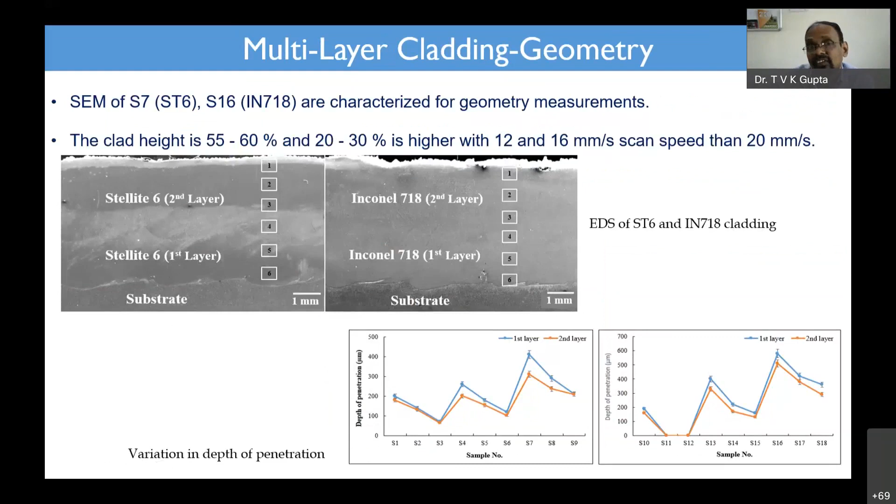So we try to understand the dilution both by geometrical analysis and also through metallurgical analysis. This you can get from your EDS, which gives the densities of the various alloys present, and you can always find out what it is. At any point of time, the dilution has to be as minimum as possible.

Less than 5% is always preferable. So that we could achieve somewhere around in Stellite 6, but in Inconel we are still working on it. Sorry, this is Inconel 718, 10%.

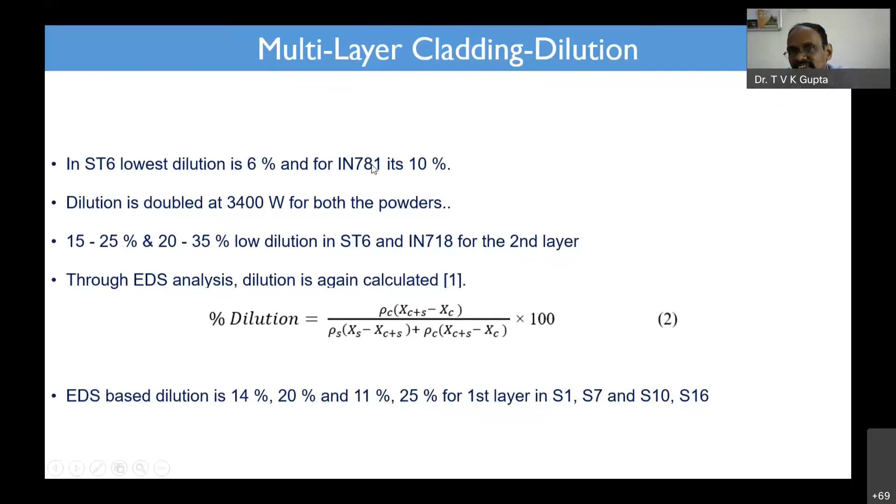So he tried to understand the microstructure also, and the temperature. What the student worked on is temperature, distortion and microstructure - these three properties we try to evaluate in terms of online monitoring, in-process monitoring.

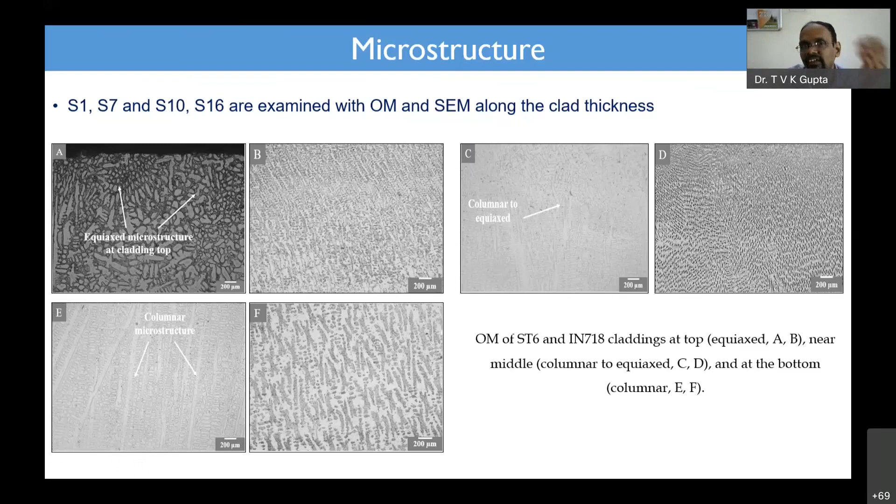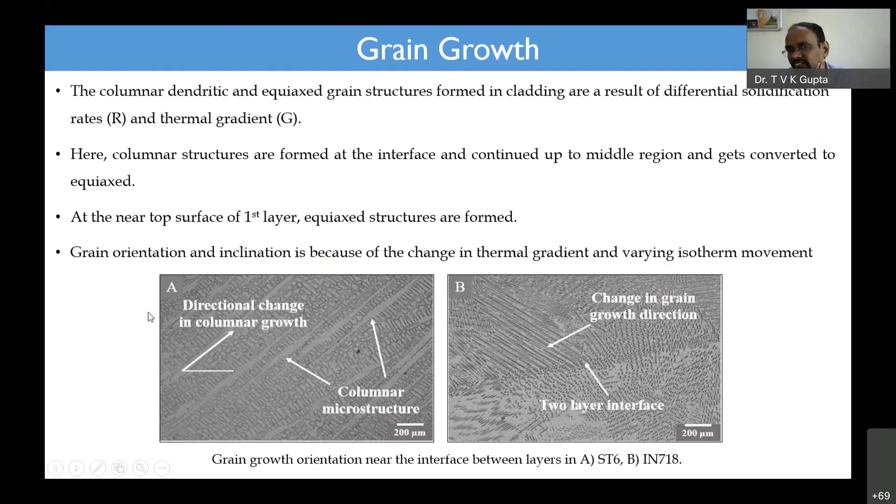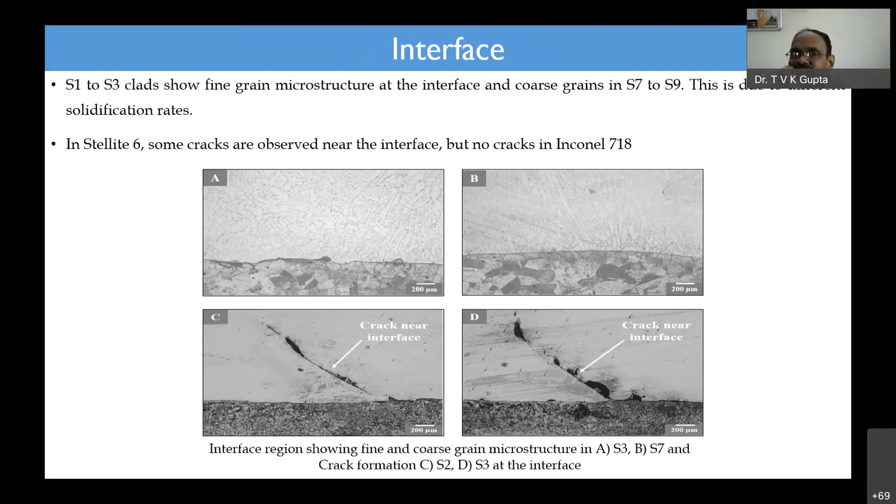Now, when I say distortion, all the experiments I have talked about involve only free movement. So because of the inbuilt stresses, it is getting deformed.

Now what people are understanding is whether you can clamp it and do it - that is also possible. So then we tried with different setups. One is free distortion, free movement, and one we have done as a cantilever type, and the student has done a fixed support.

So which fixed supports have you done? This one you have done. So obviously you are going to have different types of deformation at different locations, right?

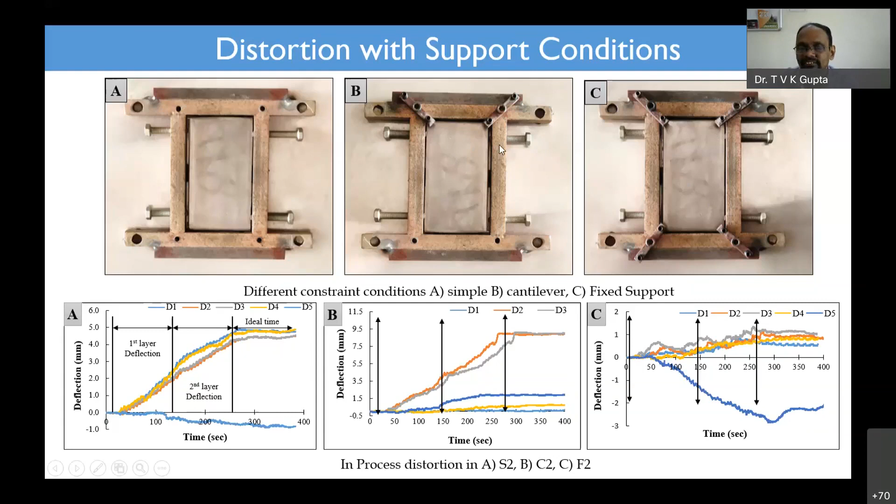If you see, before cladding it is something like this; during deposition you will have a concave, and you will have a convex after deposition. So finally it comes to whatever is the deposition - the longitudinal bow of deposition you are going to see.

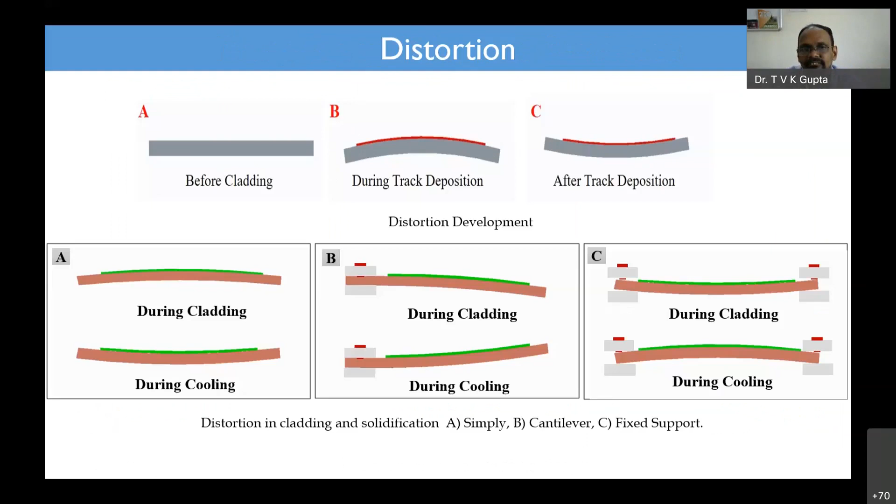Now, this is the latest set of experiments which we have done. He will be talking more - Chaitanya will be talking more tomorrow about these types of experiments.

So we have gone up to - this is like 12 tracks and 11 layers. 12 tracks and 11 layers we have deposited.

So this is very fine structure we got. He will be talking more about the tensile tests and what is the deformation, what we can say is the fatigue life. Those things we will be talking about in tomorrow's session.

So with this, whatever the research group has done, I have tried to explain all these things to you.

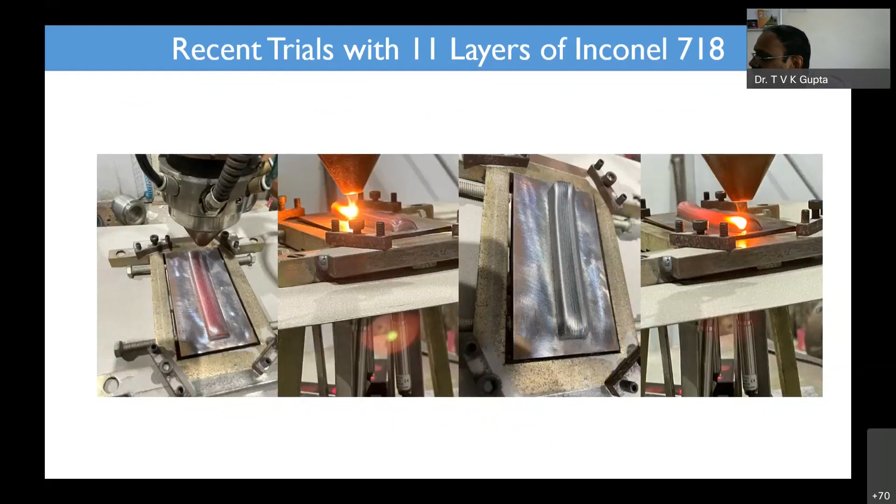Nikhil Thavri has submitted the pre-submission, and we have almost 15-16 people in the research group working on different aspects of this metal additive manufacturing.